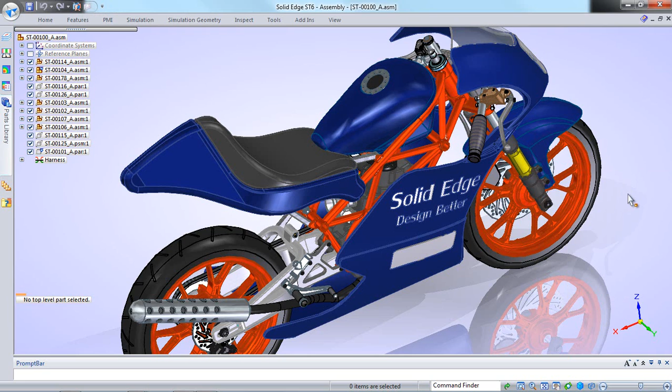My boss has come to me and said, "Hey Kyle, you know Bob, he's been working on this brake assembly, but he's gone on vacation and I need you to go out and finish it." Well, as everything else, he comes to me at 4:45 in the afternoon and tells me this.

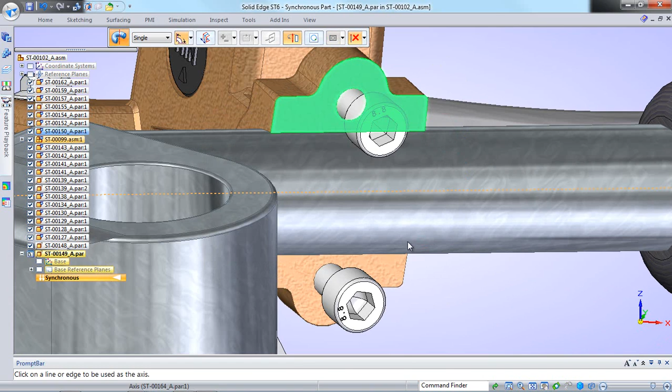And I really want to get home and be with my family. So I'm going to go out here and finish off the part that Bob has started. What we're able to do is Solid Edge can go through and just grab the information that I want from other parts in my assembly and start my design.

Now, I didn't have to go out and create a sketch or anything like that. I'm able to grab this information, and the system is able to take that information and get the design that I want.

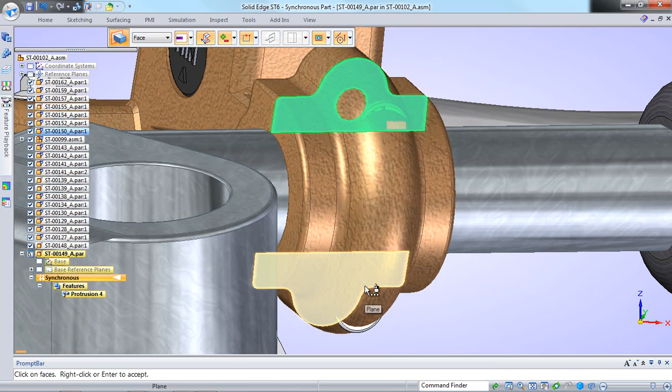Now, the other thing is that I can go out and tell Solid Edge how I want something to be made. In this particular case, I just want to go and grab the information. If the information I want isn't presented to me, Solid Edge gives me the ability, through a tool called Quick Pick, to go and grab that information and start my design.

Now, we have different ways of doing this. The system interrogates the inputs that I'm giving it and gives me the exact design that I want. Now, also inside of here, we have different ways of doing this.

Creating my design, you'll see different ways that I'm selecting information from other parts in the system to make sure I have true fit and function and be able to create that very quickly.

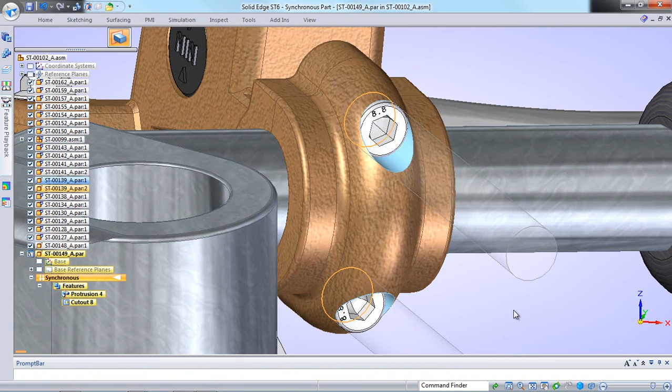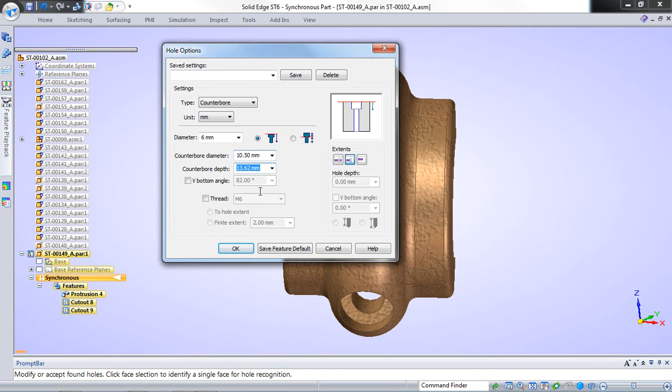As we go through this, Don mentioned a history-free system. What we're able to do inside of Solid Edge is, as you can see, I've made a couple of cutouts, and you can see them in my list of features. But I want those to be holes, and Solid Edge sees that those are counterbore holes. It gives me the flexibility to add a tolerance inside here, so I have some more room for my bolts or screws.

The other thing we can do is add some treatment features, just like rounding, drafting, chamfers. All that is right at my fingertips with Solid Edge.

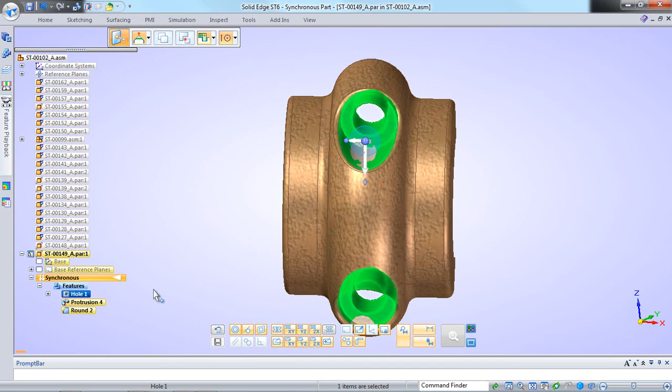Don mentioned that as we go through a history-free system, we really don't have to worry about regeneration of the part itself. If you noticed, as I drag and drop that hole above my protrusion in my list here, in a history-based system you wouldn't be able to do that, because you need the protrusion first before you have the hole. This just proves that regeneration of parts is going to be lightning fast inside Solid Edge. So with that done, I'm before 5 o'clock. I get to go home, be with my family, and that's how we accelerate design inside of Solid Edge.

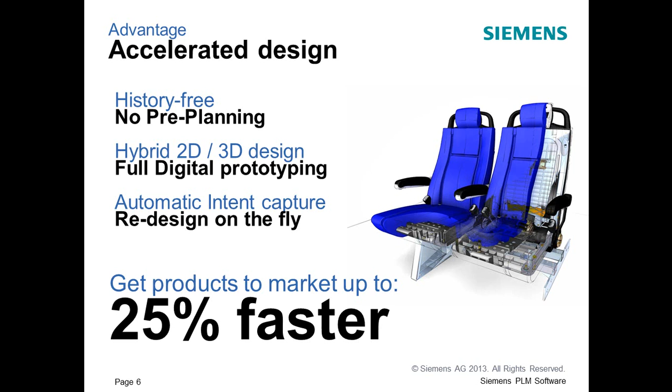Excellent, Kyle, thank you very much for sharing that, how we accelerate the design process with Solid Edge and synchronous technology. It was amazing to see how you could take that design, and you got that from your boss, and continue that brake assembly, without having to deal with whether the engineer planned for those changes. You were able to do that with no pre-planning and move the geometry around it. So exciting stuff. The next competitive advantage we'll talk about with Solid Edge is the ability to facilitate faster revisions.

You might be asking yourself, faster revisions? What do you mean by faster revisions? Allow me to explain. In the fast-paced world of design and manufacturing, winning new business and making profits on projects can hang on the ability to respond to your customers quickly and efficiently. Solid Edge with synchronous technology has a unique capability that allows designers and engineers to make fast, flexible changes to models and drawings in a constraint-free environment, regardless of the authoring source.

The way Solid Edge facilitates this is with an engineering concept I introduced on my previous slide, but I'll now go a little deeper. Solid Edge does this by automatically interrogating the engineering model and presenting the user with possible design functions seamlessly at their fingertips. We call this live rules. It's like having an experienced co-pilot with you as you drive the software.

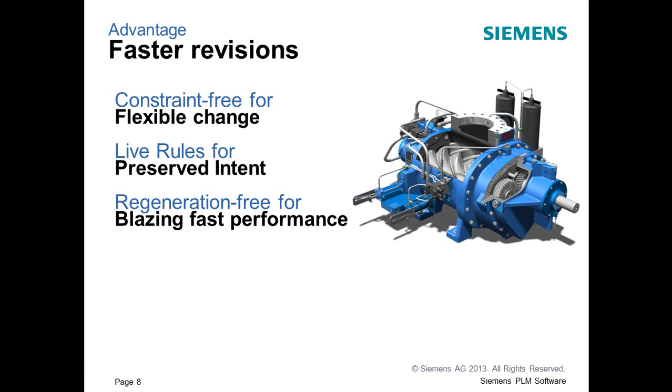And if that's not enough, the most valuable part of Solid Edge with synchronous technology is that models don't regenerate. What this means for the designer and engineer is that they can expect blazing fast performance. What does it mean to you and your customers? Well, Solid Edge with synchronous technology allows you to make design revisions in minutes instead of hours. This allows you to secure a competitive advantage in your business.

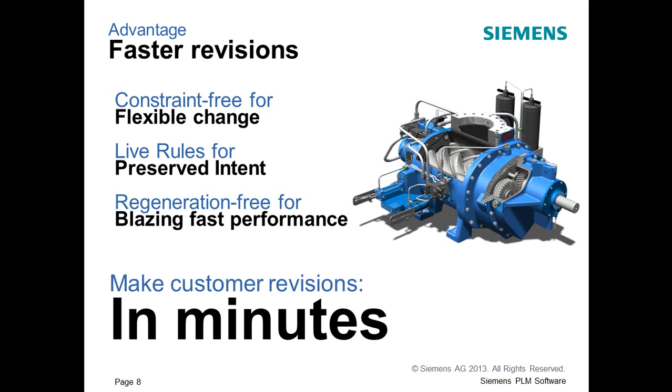I'd like to now pass it over to Kyle Ruda, where he's going to show you what we mean by faster revisions. Thanks, Don. A couple of different ways we can actually look at revisions.

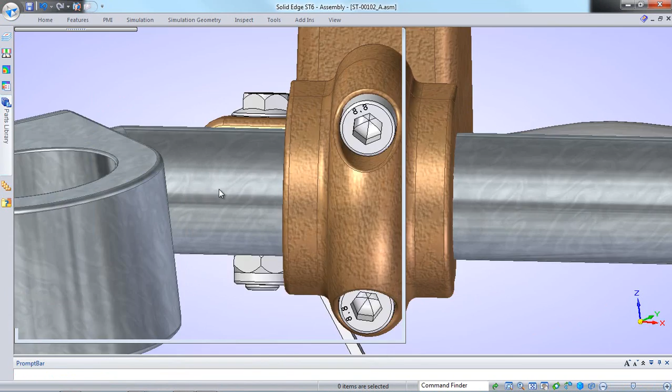Think about this: any part that I open up inside Solid Edge, I can actually make a revision to. What we have here is a part that came in from one of our sister companies, a company we just purchased, and they have SolidWorks. But it's my job to go in and make this revision to the part that we want to use on our motorcycle. We've been told that we don't need counterbore holes anymore, we need simple holes, and we need to change them to 10 millimeters. So to make that change inside of Solid Edge is that quick.

I don't have to worry about thinking about it. Now, Don was mentioning live rules. What live rules does is it actually, like Don said, interrogates that model. And as I'm moving this one face, notice everything else that moves along with it. That's that experienced co-pilot sitting right next to you, showing you exactly where you're going with your design changes.

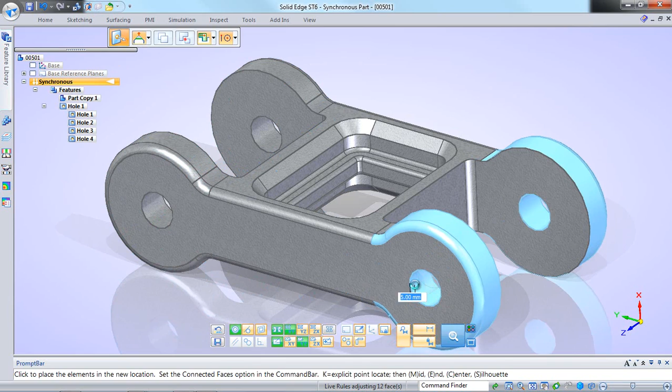One of the other critical things we've been told is that the distance between the holes needs to be a certain distance. So I want to go in and add a 3D dimension to this part. The critical dimension is 95 millimeters. So I can go through - we have inside of Solid Edge what's called directional dimensioning. As I go through and move this, I really want this to grow symmetrically. So as I make this change, the part grows, and it does so by using live rules.

You can see it has concentric faces inside of it, showing that it's symmetric. All of that is being seen by live rules, so I can easily make that change.

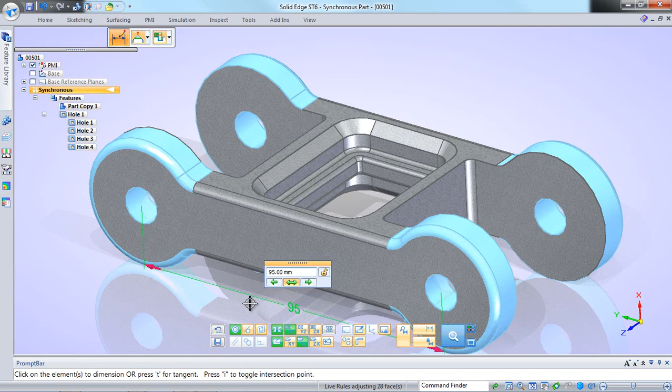Now Don also mentioned hybrid 2D, 3D modeling. What does that mean? Well, one aspect of it is a lot of times we really like to look at a 2D section view of this part. So what we do is perform that view inside of here, just like you would inside of a draft file. And I'm able to go through and put constraints, dimensions.

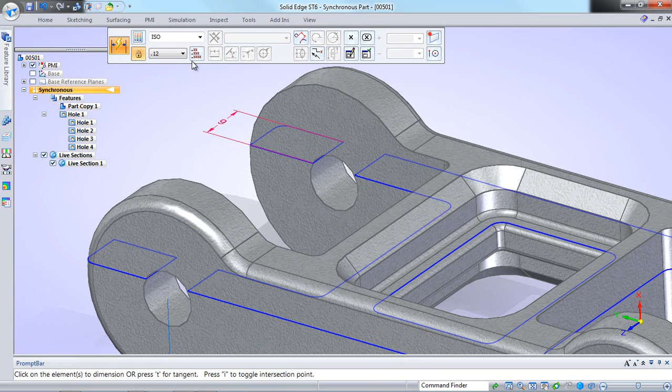I can lock this particular dimension down to be 9 millimeters to make sure that always stays 9 millimeters. But we've also been told that a critical dimension between these two faces needs to be 50 millimeters. So as we go through here, I can select that information, and we can easily change this to 50 millimeters.

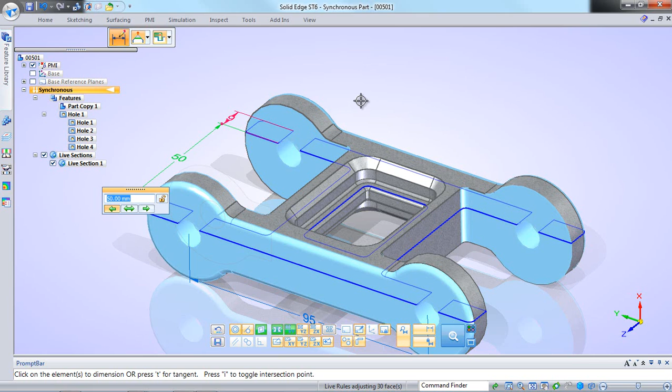But again, I don't have to think about how this part was designed. In fact, I didn't design it, somebody else did. So think about how would you have made that change inside of your CAD system, and how long would it have taken? Well, with Solid Edge, as you saw, it just took a few seconds to make that change.

The other thing is I've been told that we need to remove this particular cutout. I want Solid Edge to go through and select all that information for me so I don't have to spend time clicking all these little faces and rounds. It does it automatically for me. And with that done, that's how we show faster revisions inside of Solid Edge.

Thank you, Kyle. Exciting stuff.

The final competitive advantage I'll review with you today is the capability to facilitate better reuse. How many times have you been in a situation where you'd like to reuse an existing design and use that model as your starting point for a new design? Well, with traditional 3D modeling, reusing the data could cause the user many problems in regeneration and potential unplanned errors. In the end, it might just be easier to start over.

Wouldn't it be nice to know that the day has come where you can reuse your existing data regardless of who authored it and regardless of what system it was in? The way we do that is with Solid Edge with synchronous technology. Solid Edge allows users to make precise changes to imported geometry by adding 3D driving dimensions to any geometry.

I know this is unbelievable and almost impossible to imagine, but we'll demonstrate this for you again in Kyle's demo segment in just a few minutes. Another unique capability within Solid Edge is the ability to make direct edits to imported geometry by pushing, pulling, and rotating this geometry with what we call the steering wheel.

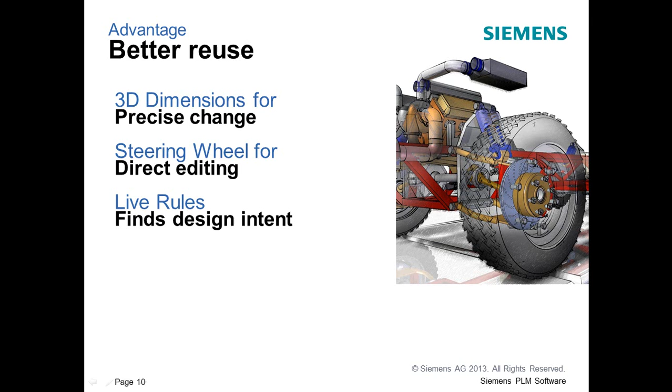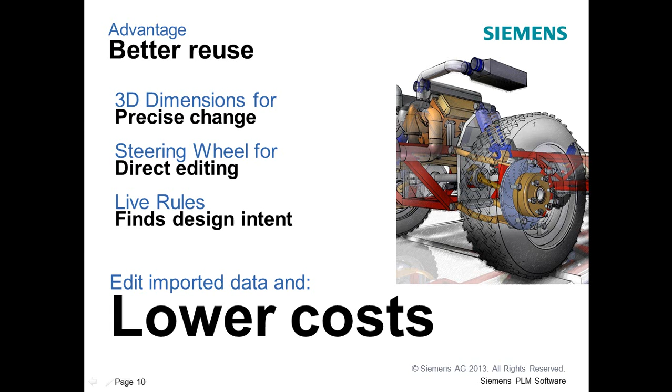What does this all mean to your company, your design teams? Only you can answer that question. We believe this means a competitive advantage, and in many cases lower overall design costs by having the ability to edit imported data and facilitate better reuse. Kyle, please show us what we mean by better reuse.

Thanks, Don. There are many different ways we can think about reuse. We can either reuse existing designs that we've had in a 3D form or actually in a 2D form, and that's what we do inside of Solid Edge. We utilize both ways of doing this.

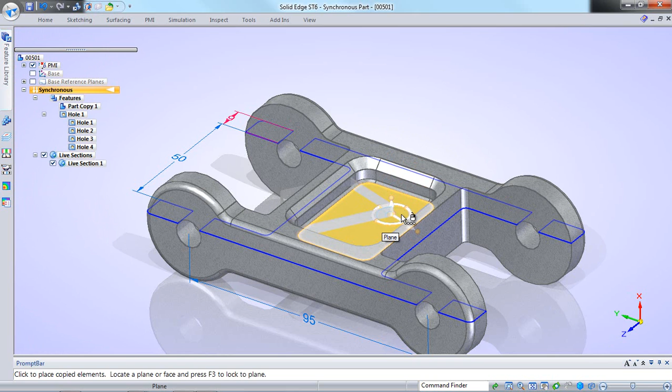Now one of the concepts that Don was talking about is the steering wheel concept. What do we mean by that? Well, steering wheel is just that - we're going to drive the geometry in the direction that we want it to go. As you can see, we can input a precise dimension inside of here, given whatever angle or dimension that you want, but also have the freedom to move this particular geometry in a 2D axis to get it exactly where I want it.

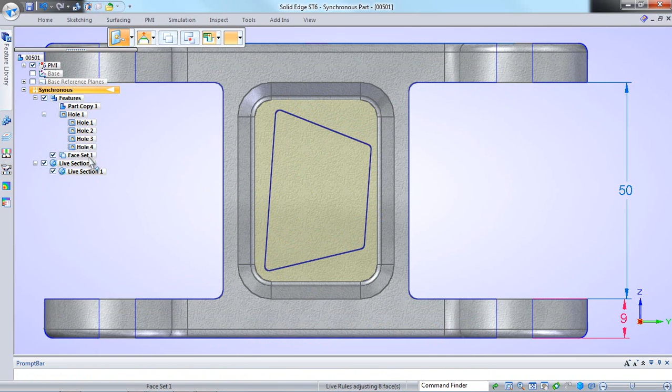And once I do that, I'm done putting it where I want it, and I can simply paste it inside of there. Notice that it automatically cuts that information out. That's how we can easily reuse the 3D design from another part. Doesn't matter where it came from, I can use it inside of here. Another way of looking at it is from a 2D standpoint.

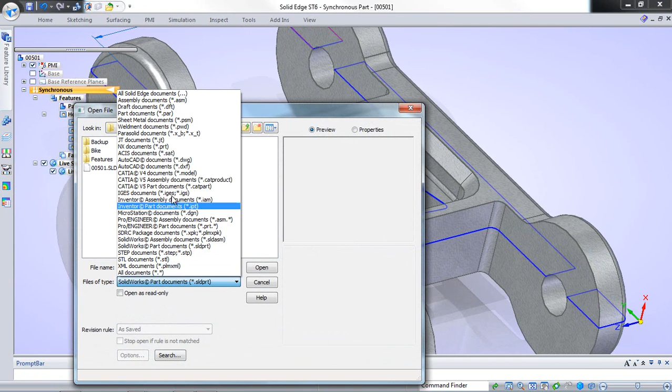We can easily go out and use 2D drawings that we had either on our legacy system or that somebody sends me. You have the flexibility to know that you're going to open up that 2D file and have all kinds of control over it.

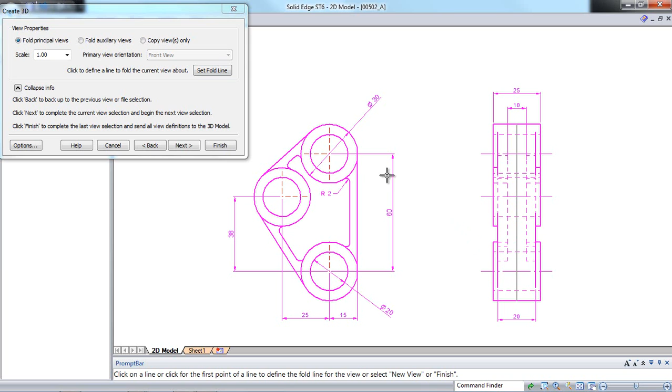But one of the unique tools inside of Solid Edge is called Create 3D. Create 3D allows me to tell the system to go out and grab these views that I want. Yes, it will fold them correctly, but it also gives me the flexibility to tell the system where I would like those views to be folded into 3D space.

So as we can see, we have my front view and my right view, exactly where I want them to be. But I'd like to draw your attention to the dimensions themselves. We talked earlier about how whenever I lock down a dimension, it turns red. But in this case, it is an orange color.

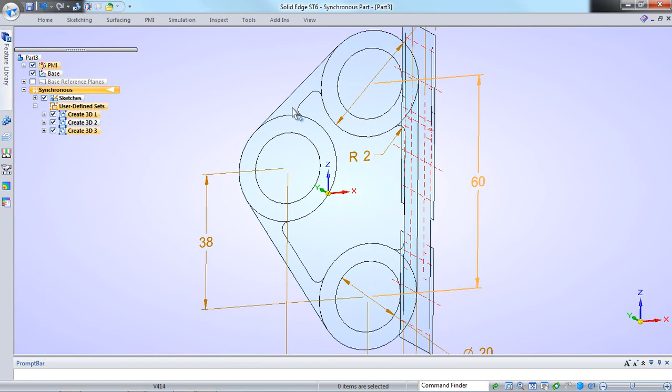Why is that? Well, the system is interacting with me, letting me know what type of dimension it is. That's the visual feedback you're going to get with Solid Edge in your designs.

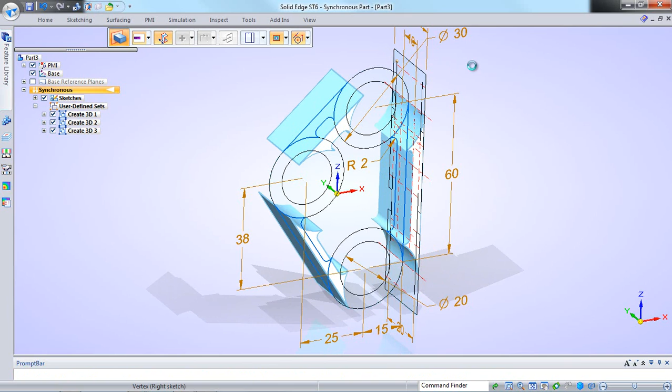Now, as we go through here, I'm going to use that 2D information to say how far I want to extrude this particular feature. I told you to focus in on those dimensions. You'll see the dimensions actually change colors. But they did more than just change color - they literally moved from the 2D sketch over into the 3D.

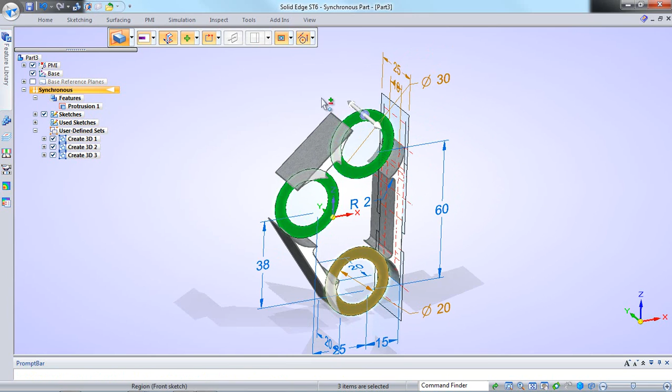And if you blinked and didn't see it, that's okay, you're going to get a chance to look at it again. As I go through and select the geometry that I want, I'm now going to extrude it out, and notice the 25 millimeters that's on top there.

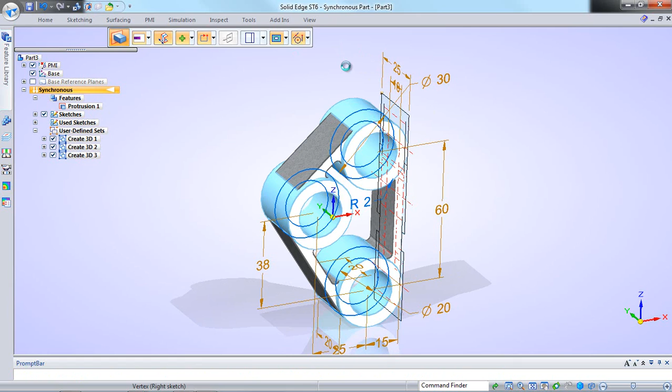Another thing is the options you have inside of Solid Edge to change your mind about how you want this geometry to actually be produced - many different options right there at your fingertips. But notice that 25 millimeters - it's literally going to jump from the 2D right onto that 3D model. That's the power behind synchronous technology and Create 3D.

Now I can come back and look at any other sketches that I've used, and reuse them at any point in time. In this case, I want to be able to extrude out this middle portion, but I want to extrude it out to 10 millimeters.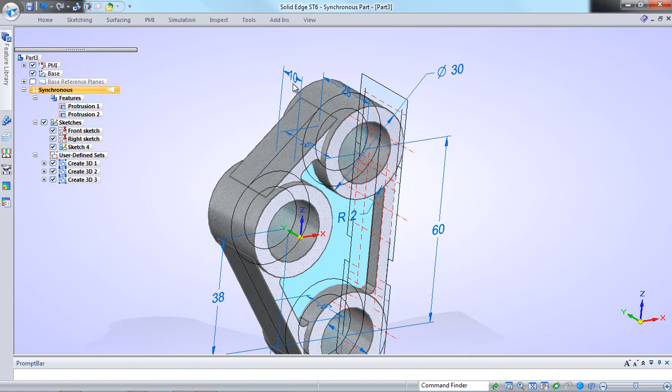But again, I'm going to use the 2D geometry right there inside the view, and watch that 10 millimeters - it's literally going to jump off of the 2D right onto that 3D part. Then I can go through and say that is a critical dimension, and I want to lock it down.

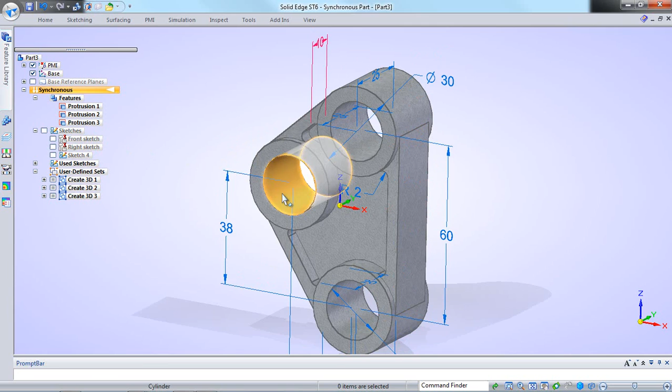Now remember, these are the manufacturing dimensions from my drawing, so these are very critical dimensions inside of here. What I'd like to do is talk a little bit more about what Don was mentioning in his PowerPoint presentation - this concept of the steering wheel.

Steering wheel allows me not only to move the geometry that I dragged and dropped in to reuse, but notice I can just pick one face and look what Live Rules is doing for me. It is going through and changing that information on the fly for me in the entire model itself.

Now there's a couple of different ways you can do this as well to have more precise control, and that's through the dimensions themselves. As I go through here, we can say we have directional dimensions, and you can see as I change that option, it's highlighting that information on the screen. I change my value, and Live Rules kicks in and shows all the geometry that it's changing for me.

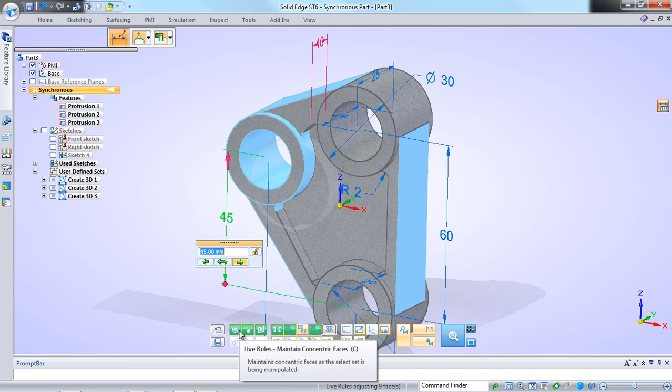And you have the option and control to go in and turn any of those Live Rules off at any point in time. This shows you the power and how you can make those changes quickly, how you can reuse that information very quickly inside of here.

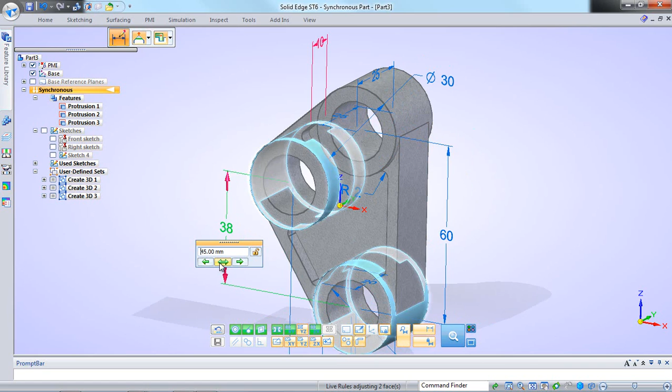And next, I want to be able to say I want to do this as symmetrical. So basically, I now have had three what-if scenarios of how I can go through and make a change to this part. So, with Don, that is how we reuse data inside of Solid Edge better.

Great, Kyle, absolutely amazing stuff you're sharing with us here. So the question becomes for many customers: how does this great technology translate into business benefit and a competitive advantage? For both NavC and Laserform, it meant exactly that—a competitive advantage in time savings.

After adopting Solid Edge with synchronous technology, many of these companies are now reporting back to SIS and to Siemens drastic time savings, drastic cost savings.

For example, NavC, located in southern Indiana, the Naval Surface Warfare Center, is seeing a dramatic time savings in their engineers' ability to accelerate their design process and have better reuse of their data.

Accelerating the overall cycle time. Another company, Laserform, in the area of machine design using sheet metal, is also seeing dramatic time savings in their ability to respond to their customers faster.

Now just imagine for a minute what this type of advantage could have for your company, partnering with Solid Edge and SIS. Imagine the cost savings on each project, the reduced cycle time, and the quality of life your engineers could have. Really, it comes down to getting the job done quicker and gaining a competitive advantage for your business.

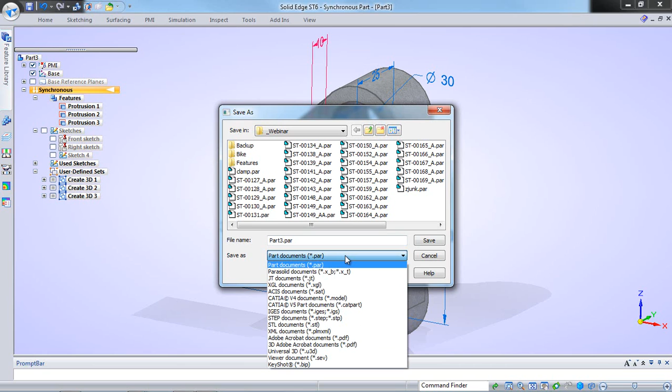Now to save out, that really depends on if you're saving as a 3D file or a 2D file. From a 3D standpoint: Parasolid, JT, XGL, ACIS, CATIA again if you have that add-on, IGES, STEP, STL, XML, Adobe 3D, and of course KeyShot if you have that rendering package.

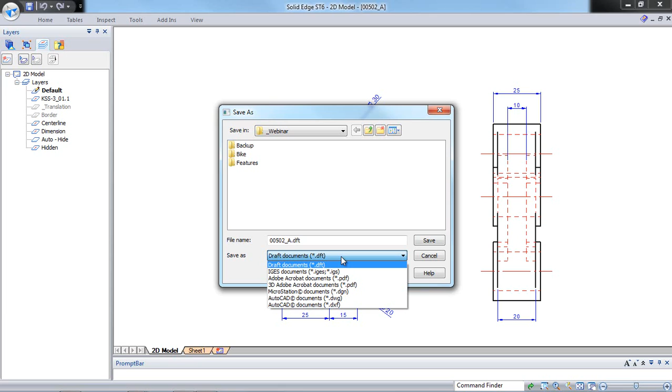From a 2D standpoint, we have many different options. Again, for opening, you can open up AutoCAD 2D or any MicroStation 2D file inside of Solid Edge. But to save out, which is what most people really want to know, is IGES 2D, Acrobat PDF, MicroStation, and of course DWG or DXF. You have the full capabilities of your line types and fonts within Solid Edge.

So with Don, let's see if we have any more questions.

Yeah, thank you, Kyle. We do have one more question online. I'm used to working in SolidWorks—how long will it take me to learn Solid Edge?

That's a very common question we get, Don. Really, once you learn a 3D CAD system, you're that much closer to learning Solid Edge. But to make the transition a whole lot easier for users not used to Solid Edge, we have what's called the Command Finder, down at the bottom of my screen.

Whatever CAD system you're using, you can type in a command. So for a SolidWorks user, they have a command called shell. As I look at that, we don't have a command called shell inside of Solid Edge—we call it thin wall.

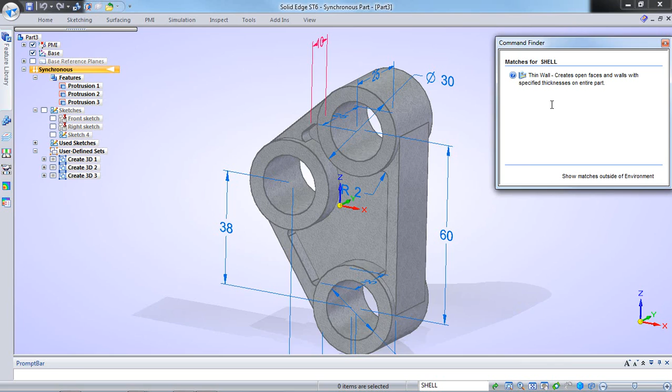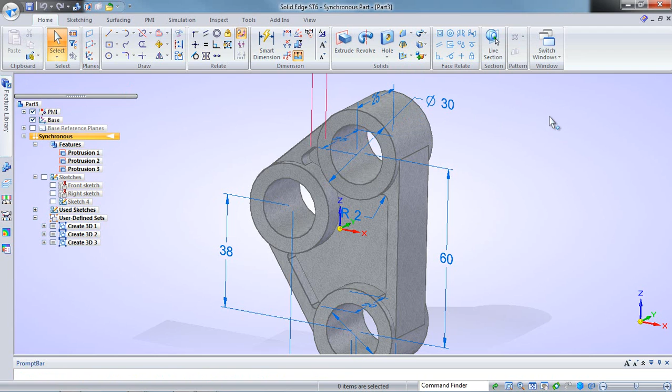Now what it will actually do is show you what it is, and as you put your cursor on it, it will show you in the interface where that command is. If you click on it, it takes you right into that command, so you don't have to worry—you can go right into it. That's what makes your transition over to Solid Edge a lot quicker and will actually make you more productive. So back to you, Don.